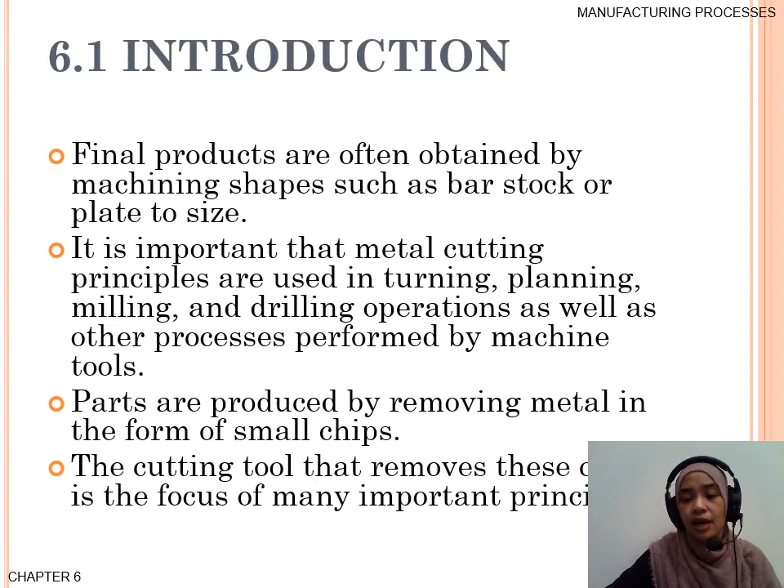Parts are produced by removing metal in the form of small chips. The cutting tool that removes the chip is the focus of many important principles.

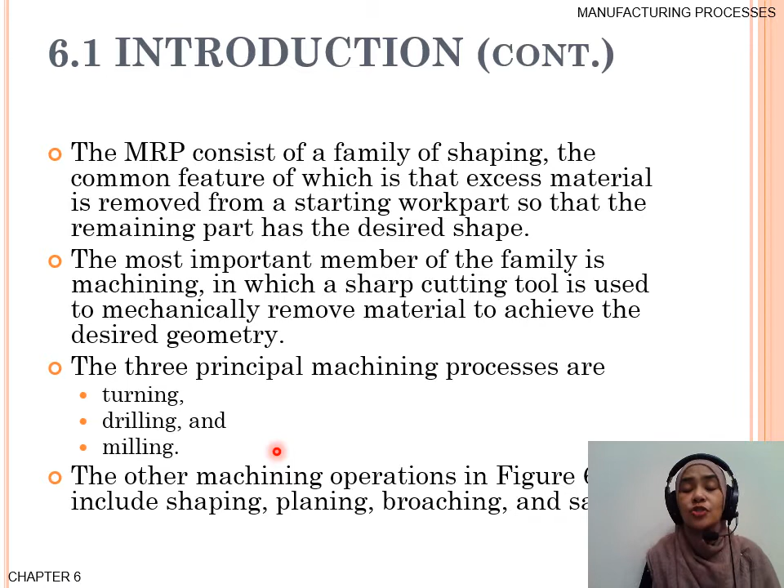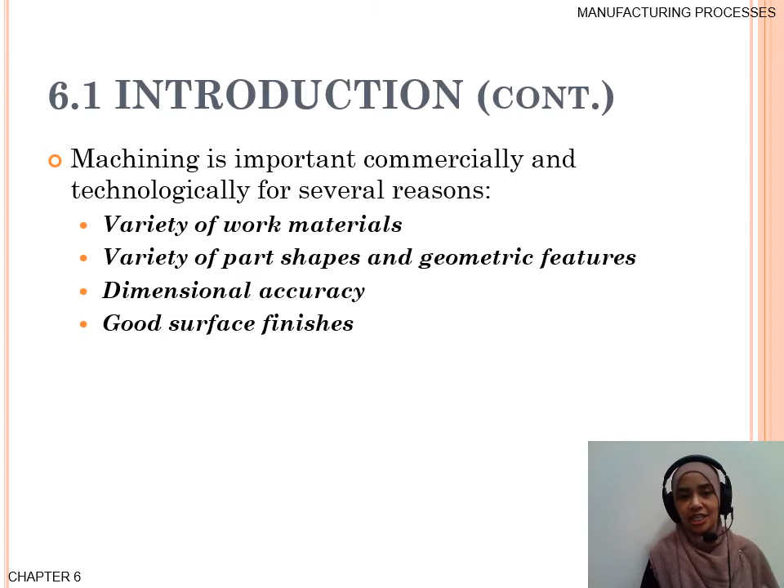The second importance is variety of part shapes and geometry features, allowing you to obtain diverse shapes with higher dimensional accuracy. Having high dimensional accuracy means it also offers you a very good finish.

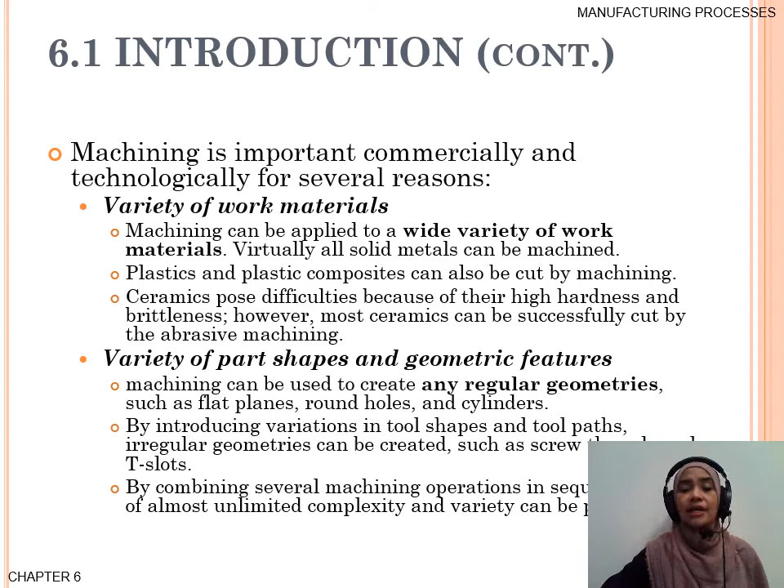Going deeper into variety of work materials, variety of part shapes and geometry features, and dimensional accuracy - the tolerance can be plus minus 0.025mm, and nowadays we can achieve microns. Finally, we have very good surface finish with average values less than 0.4 microns, so very smooth. Because of this smoothness, machining allows you to achieve very good dimensional accuracy.

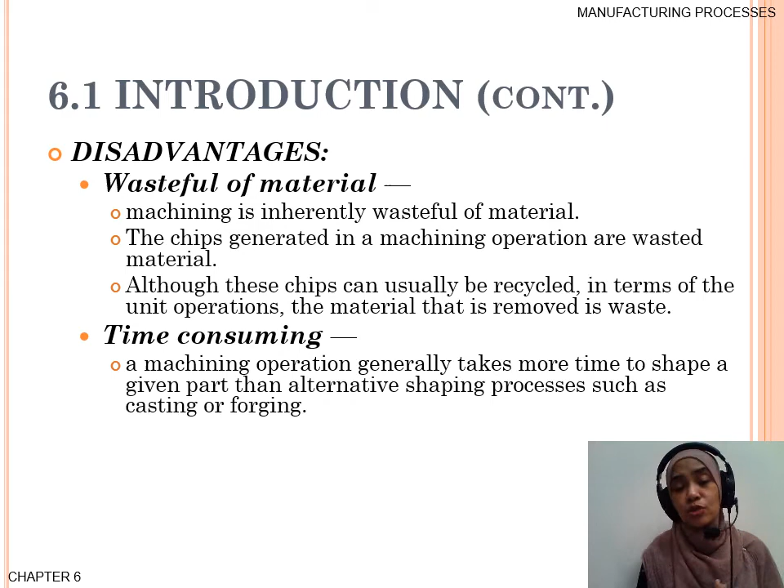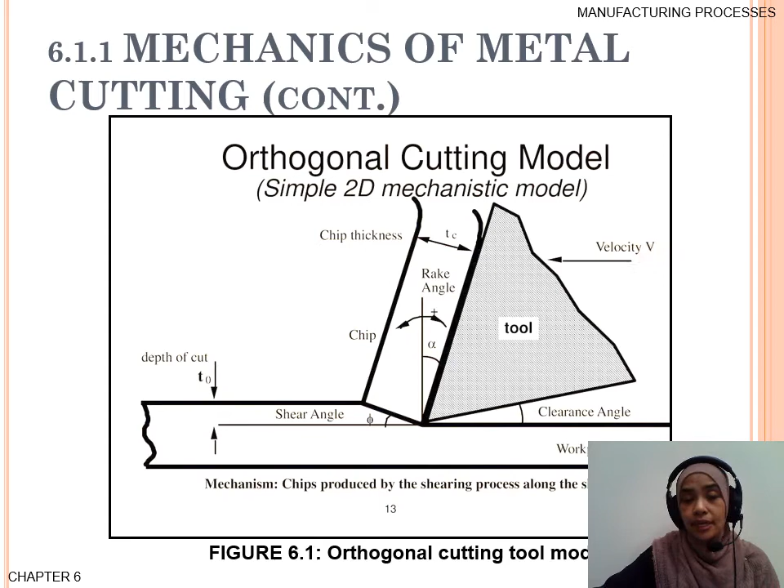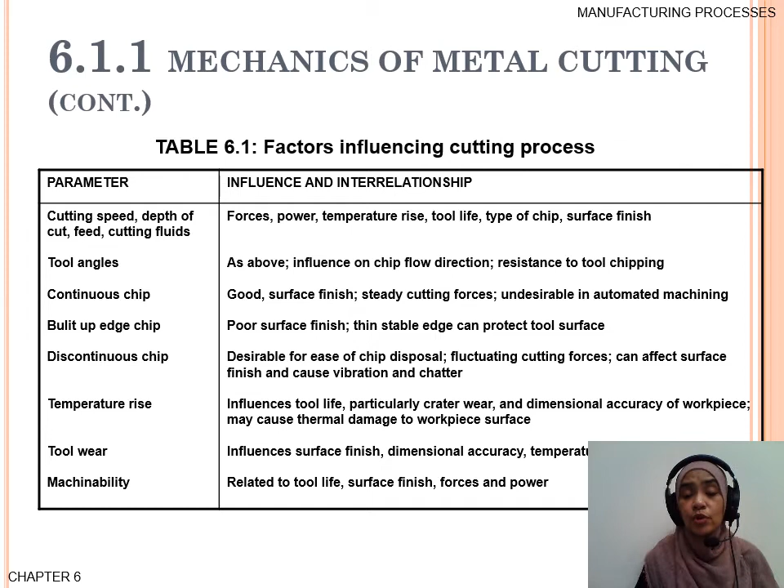And then this parameter will influence the cutting process, such as forces yang terhasil, power yang digunakan, rubbing action lead to the temperature rise, tool life, jangka hayat mata alat, and so on etc. Okay, so here is the independent variable.

Kita ada tool material, kita ada coating, kita ada tool shapes, surface finish and sharpness, kita ada workpiece material condition, and temperature, cutting parameter such as speed, depth of cut, DOC dan juga feed. Cutting fluid yang digunakan, the characteristic of the machine tool, work holder and fixturing.

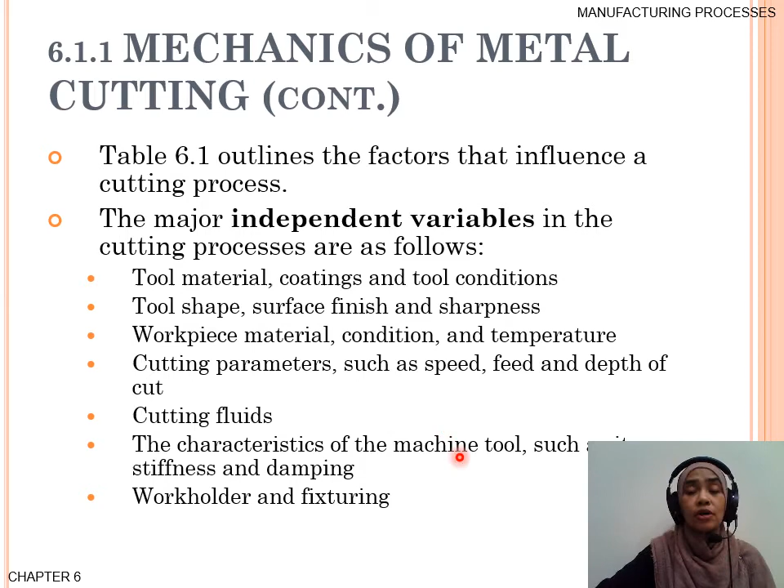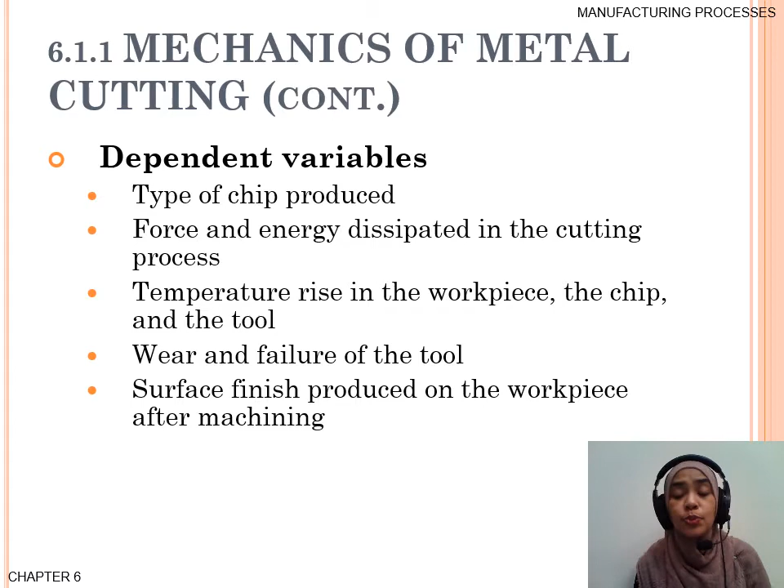Okay, manakala dependent variable pula, maksudnya hasil daripada pemotongan tu. Kita ada chip produce, akibat daripada setting parameter yang awal tadi. Macam tu, force energy dissipated in the cutting process. Temperature rise in the workpiece, chip and the tool, wear, failure of the tool, surface finish produced on the workpiece after machining. Okay, all those things very related dengan parameter yang kita dah pilih earlier.

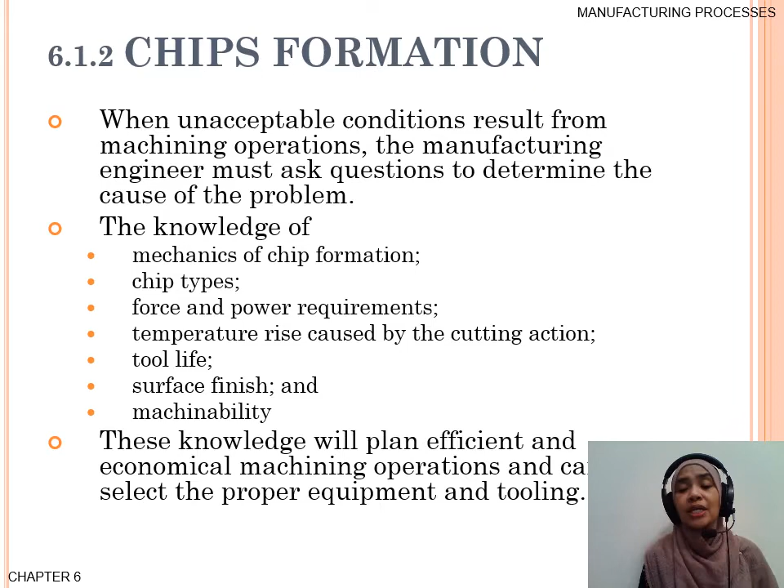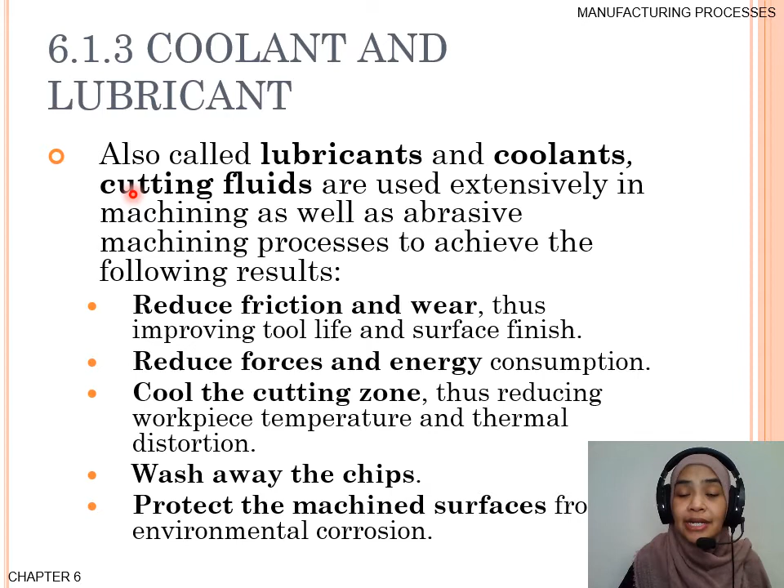Last but not least, in order to protect the machined surface. Bagai yang kita dah mention tadi, akan dilindungi oleh coolant tadi sebelum dia expose kepada air yang boleh menyebabkan dia cepat karat, maksudnya logam kita cepat karat. Jadi biasanya cutting fluid basically terdiri daripada coolant ataupun lubricant lah.

The effectiveness in the cutting operation bergantung kepada beberapa faktor, which is method of application. Maksudnya bagaimana lubricant ataupun coolant ini bertindak, bergantung kepada sejauh mana keberkesanan of the cutting fluid ini, bergantung kepada method of application, temperature, cutting speed, and also types of machining operation.

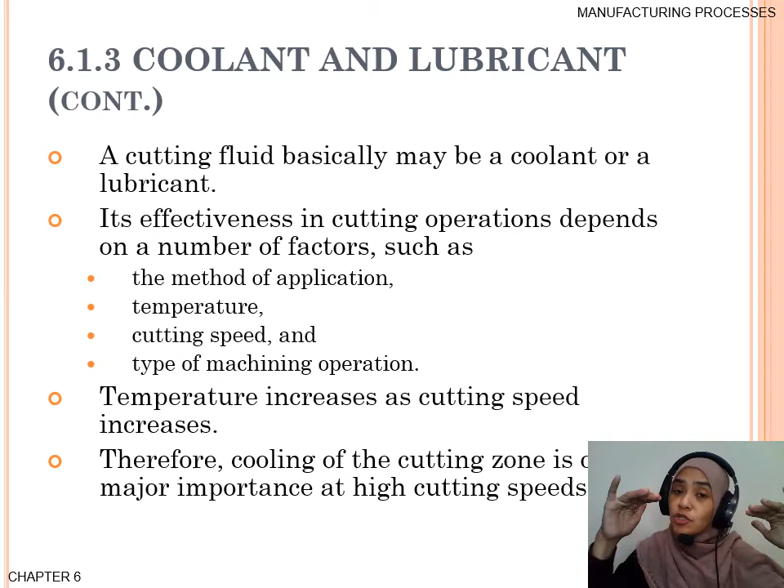Biasanya kalau lagi laju cutting speed, maka akan meningkatkan dia punya temperature lah. Jadi bila temperature dia meningkat, dia akan meningkatkan kita punya affected of heat affected zone tadi. Jadi di sini penting tentang penggunaan coolant, because they will reduce down the temperature rise dekat kawasan pemotongan tadi.

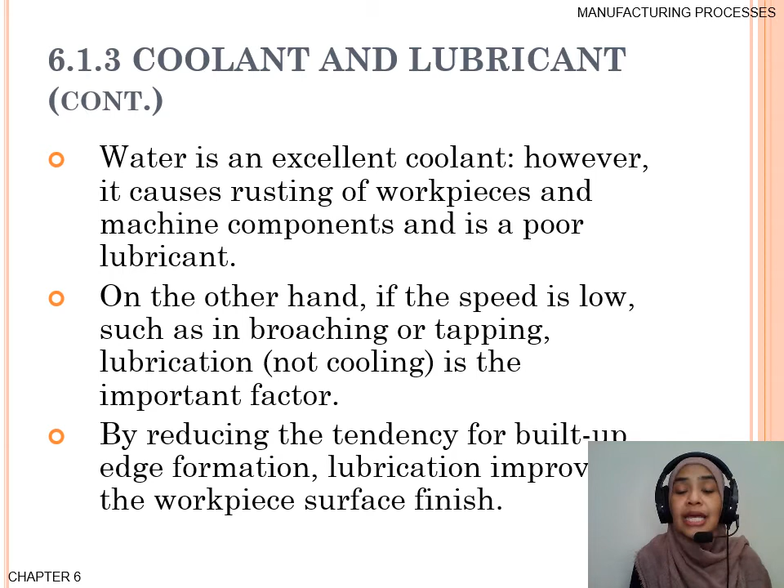Obviously dalam banyak-banyak ni, water lah yang merupakan asal punya coolant. This is the excellent one sebab dia murah, availability tinggi dan sebagainya. Somehow masalah dengan air ni adalah dia akan expose kepada oxidation, so dia akan menyebabkan logam tadi senang untuk karat.

Kita boleh review sikit. Kita ada beberapa jenis cutting fluid, which is oil, emulsion, semi-synthetic and also synthetic. Kalau dah lama pun kita tahu yang synthetic tu paling berkualiti lah kot, bergantung kepada kita punya specification.

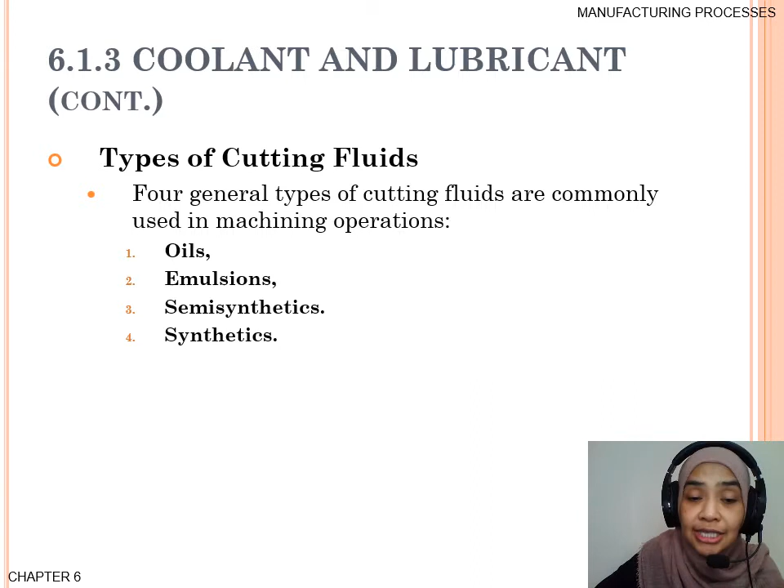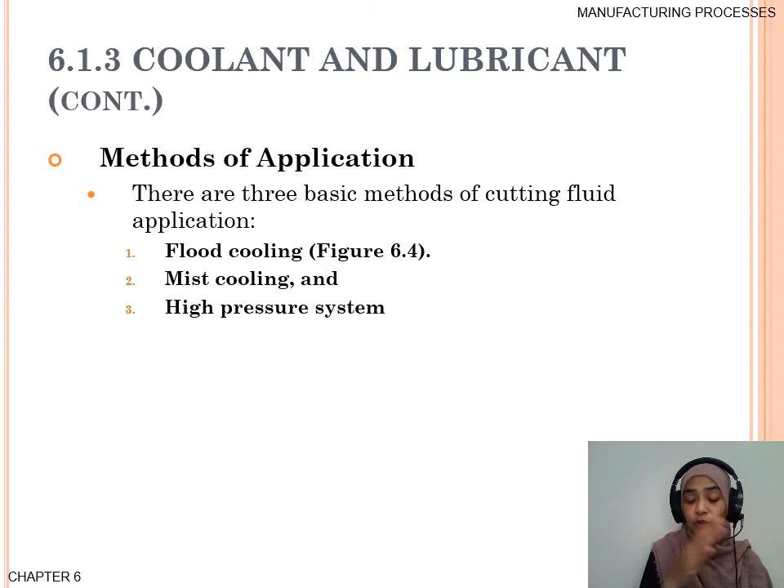Dari segi method of application, kita ada fluid ni yang dibanjirkan, maksudnya dia tenggelam betul. Ada yang dapat mist, maksudnya sembur, ada juga yang dapat high pressure system, bergantung kepada keperluan dia lah.

So the first thing kita akan bincangkan tentang flood cooling. Flood cooling ni yang paling biasa digunakan lah. Dari segi kadar flow rate, dia sekitar 10 liter per minit, maksudnya dalam masa 1 minit tu dia boleh mensupply atau membekalkan lebih kurang 10 liter coolant, which is kalau per cutter tu 225 liter per minit per cutter of multiple tooth.

Multiple tooth contohnya macam apa? Macam miller for example. So in operation such as gun drilling and milling, the fluid pressure sekitar 700 kilopascal sehingga 14,000 kilopascal, in order to wash away the chip and cooling the cutting zone.

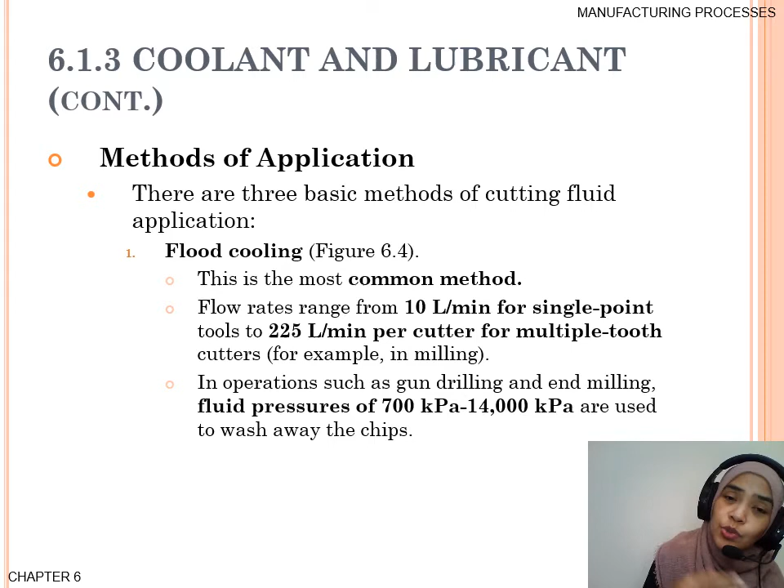Yang kedua kita ada mist cooling. Mist cooling ni macam kita kata macam aerosol tu lah, kita sembur macam tu. It supplies fluid to inaccessible area and provide better visibility of the workpiece being machined.

Biasanya dibuat daripada water base, dan in grinding operation dia punya tekanan dia boleh pergi daripada 70 kilopascal hingga 600 kilopascal. Itu untuk mist. Dia memerlukan ventilation to prevent the inhalation of the fluid particle by the machine operator and the others nearby.

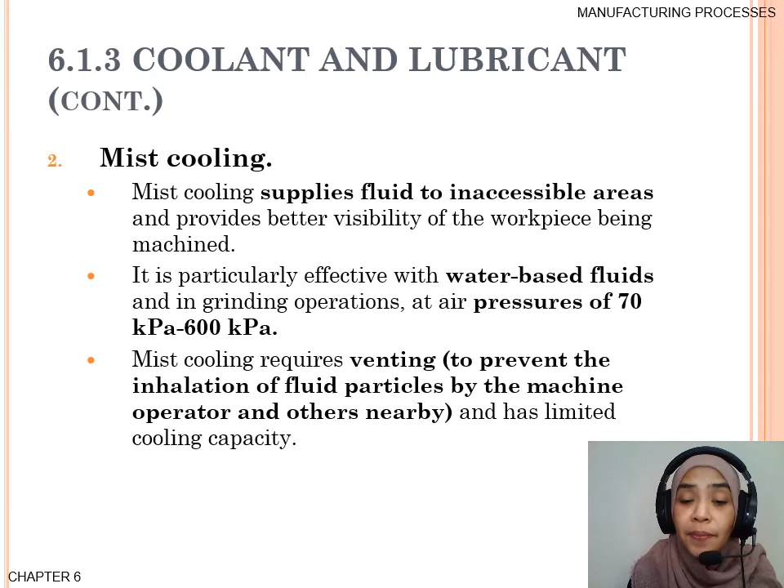Yang ketiga kita ada high pressure. This one is equipped, kalau kita ambil pola, kita ada dekat HSM, high speed machining, with increasing the speed and the power of modern computer control machine tool and heat generation in machining operation has become a significant factor.

So the recent development include the use of high pressure refrigerated coolant system to improve the cutting rate, atau kita kata the rate of heat removal from the cutting zone. Lagi cepat kita letak coolant dekat kawasan cutting zone tu, lagi kita boleh prevent kita punya machine surface especially from any kind of karat dan sebagainya.

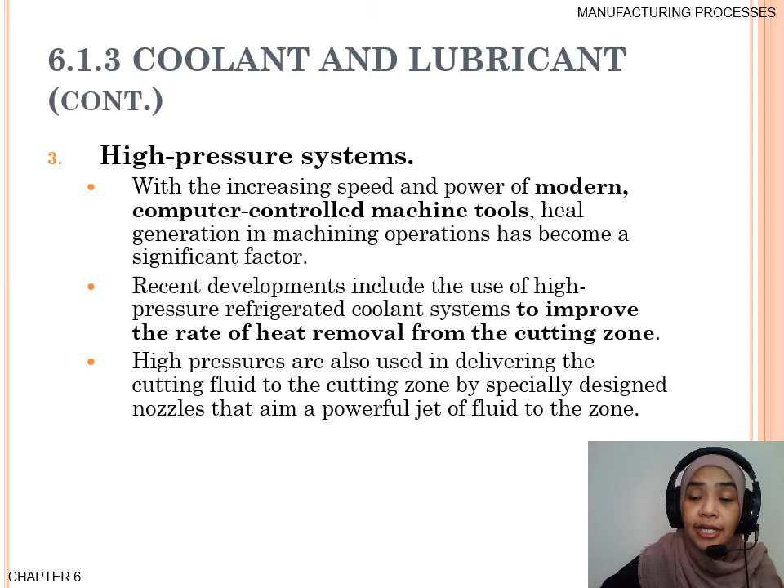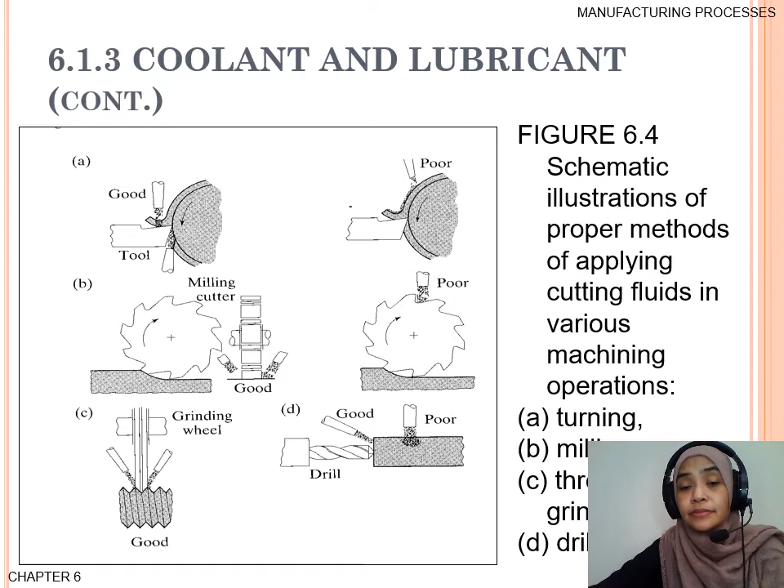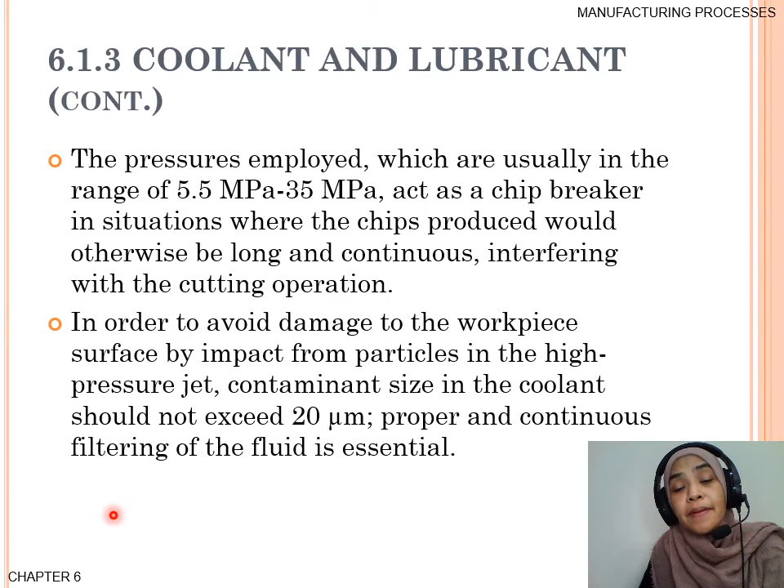So basically the pressure employed usually dalam range 5.5 hingga 35 megapascal.

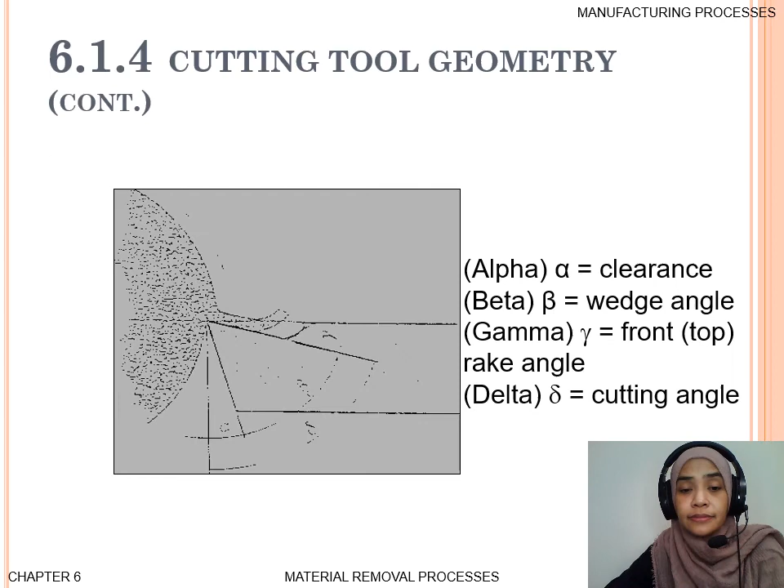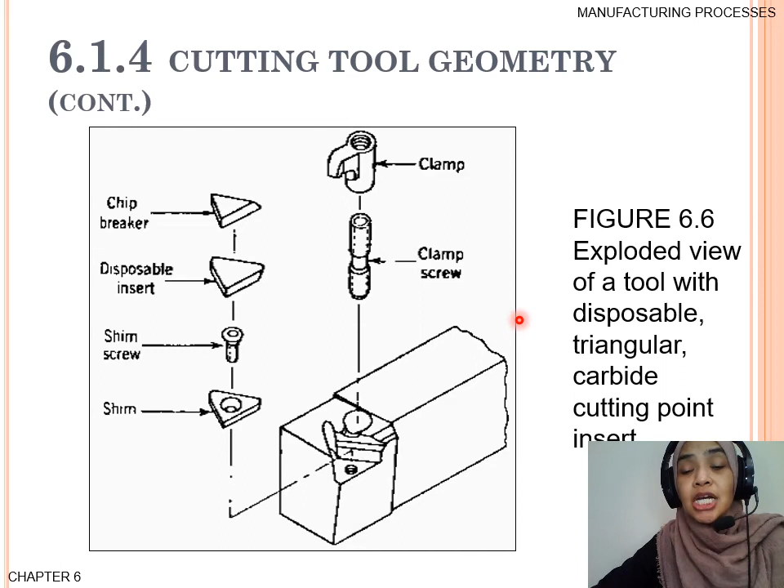Okay, kita pergi laju sikit. This is how kita pasang mata alat pada carbide cutting point insert. Kita nak pasang insert carbide pada milling machine, to hold the for milling machine.

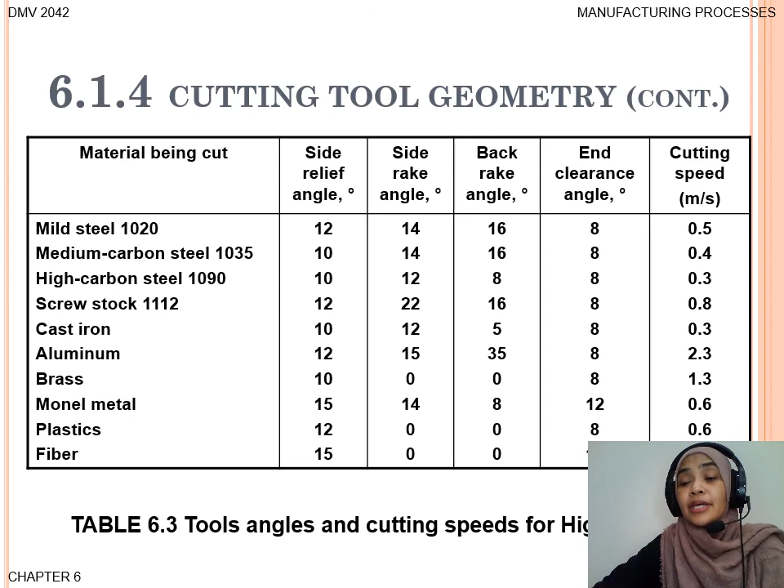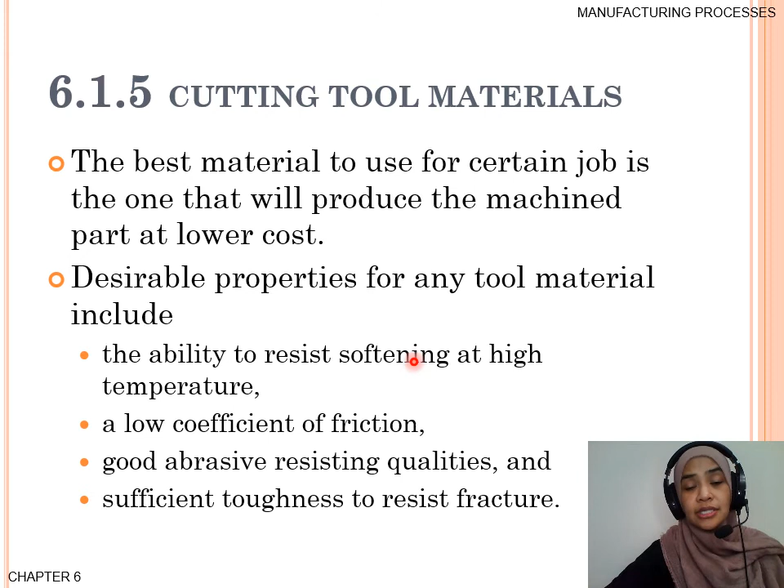Desired properties for material to be a cutting tool: the ability to resist softening at high temperature, maksudnya kalau terdedah kepada suhu panas, dia tak akan jadi lembut atau soften. Low coefficient of friction, supaya boleh reduce geseran dan meningkatkan jangka hayat cutting tool. A good abrasive resisting qualities, tidak senang tertanggal. Sufficient toughness to resist fracture, ini adalah general line.

Okay, what kind of cutting tool material yang biasa digunakan? Kita ada high carbon steel, high speed steel, carbide and diamond.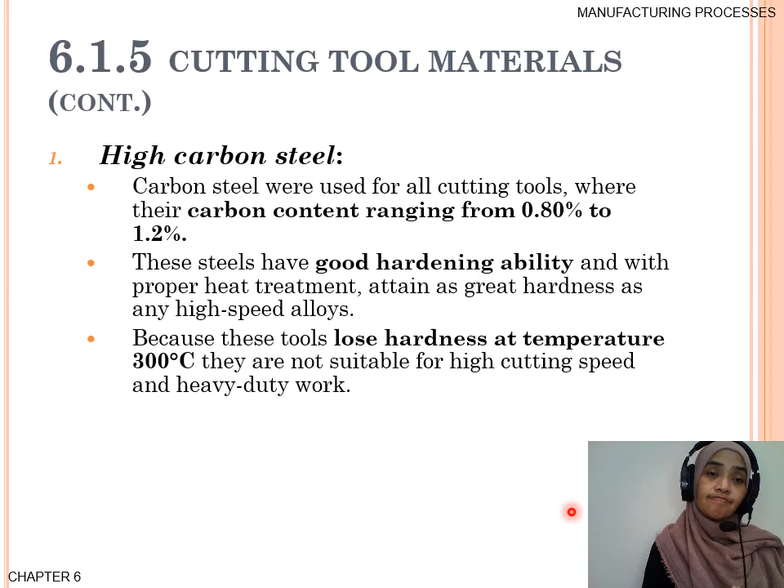So yang pertama high carbon steel. Kandungan karbonnya 0.8 hingga 1.2, ada maklumat kata hingga 1.4. Dengan kandungan karbon yang banyak, hardness dia tinggi, strength pun tinggi. Mungkin tertanya, kalau hardness dan strength tinggi, macam mana dengan brittleness? Ingat, selepas proses quenching, kita follow dengan tempered, jadi tempered material jadi lebih baik toughness-nya. Mereka masih ada good hardenability, dan dengan proper treatment kita boleh dapat hardness sehingga high speed alloy hardness. Tapi dari segi suhu, dia boleh expose sehingga 300 darjah Celsius, lepas itu hardness dia boleh terganggu.

Yang kedua, high speed steel atau HSS. Ini still sama macam steel tadi, cuma ditambah lebih banyak alloy supaya properties lebih baik. Excellent hardenability, dan boleh sustain temperature sehingga 650 darjah Celsius tanpa risau akan berubah bentuk secara mekanikal atau sikap dia berubah. Itu untuk high speed steel.

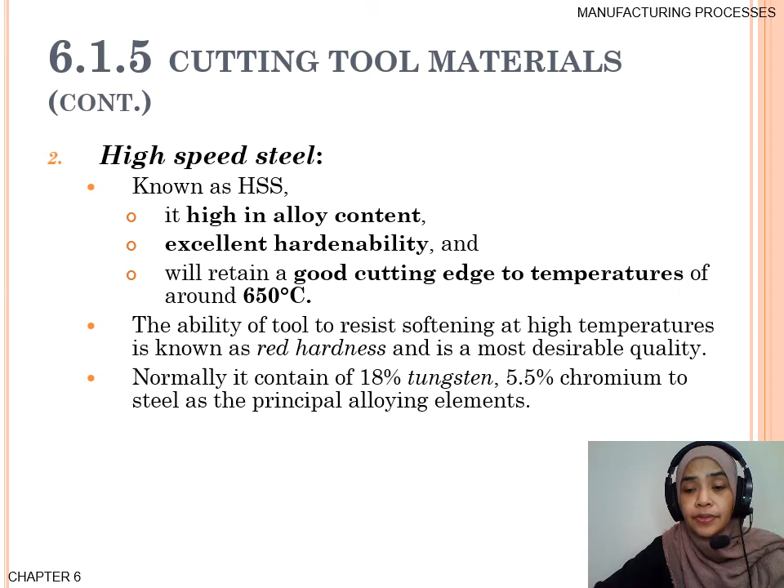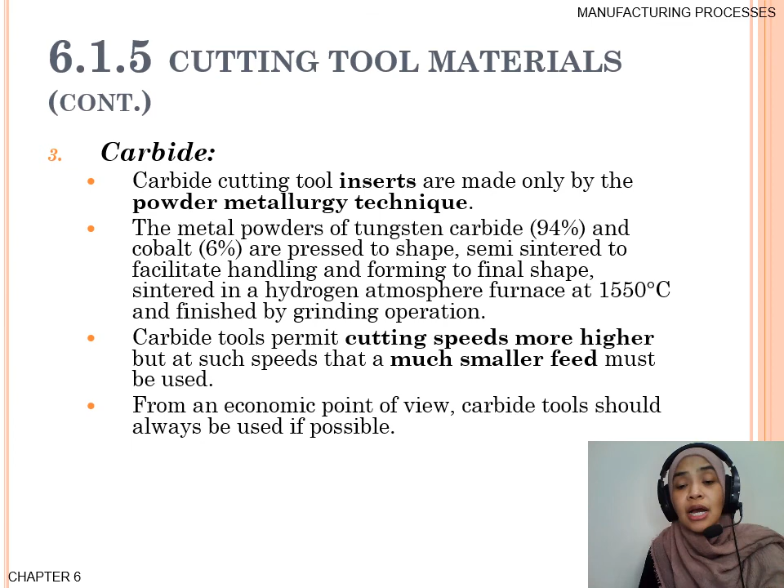Yang ketiga carbide. Kalau milling machine, insert tu dipanggil insert carbide, kerana carbide ini dibuat melalui powder metallurgy methods, iaitu compaction. Kenapa guna carbide? Kerana mereka offer kita boleh pergi untuk high speed, tapi dari segi feed dia lebih kecil.